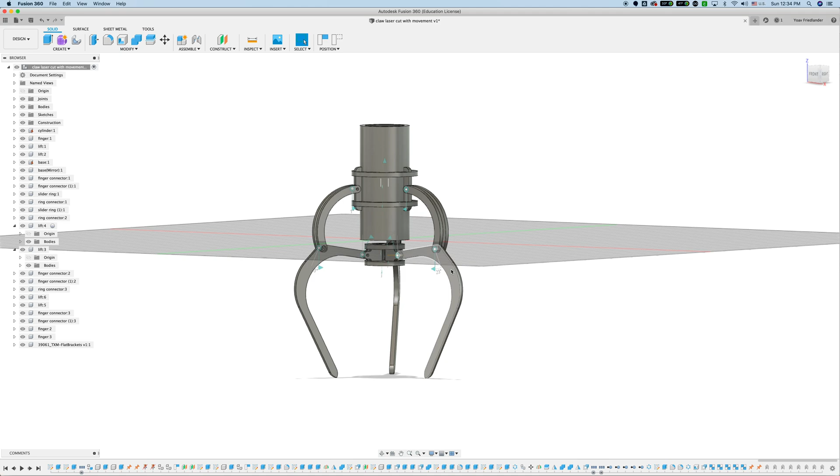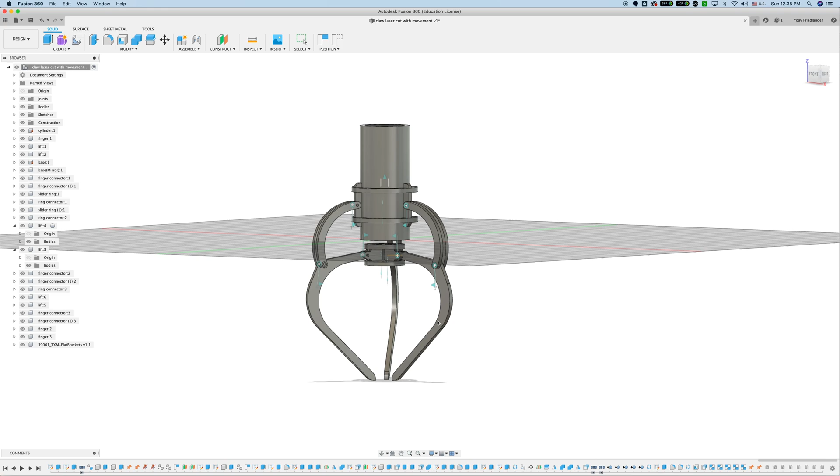I have here a design of a claw, the ones that you are familiar with from toy vending machines that are a useless mechanism that looks very cool but doesn't grab anything. I got obsessed about this idea and I made it with a laser cutter and a 3D printer. So I have this ready mechanism with all these parts that can be laser cut and one PVC pipe. And now I need to bring it over to Onshape.

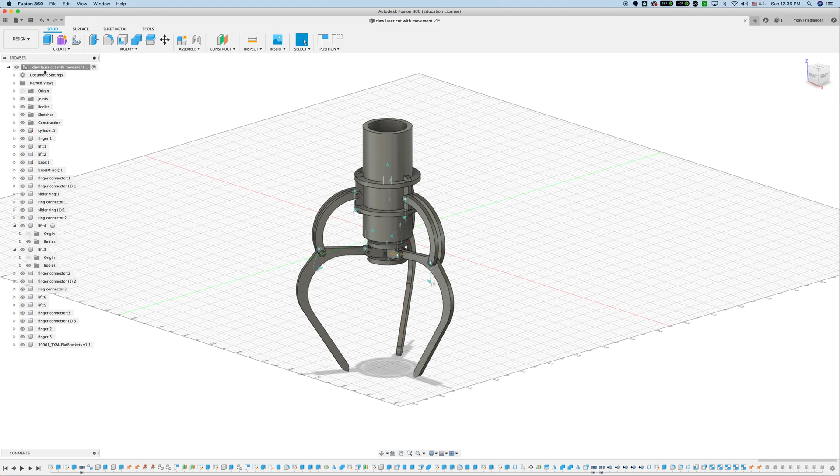There's a very easy way to do that. We first need to export our design to a STEP file. A STEP file is sort of the JPEG of CAD modeling. It's accepted in most design software, and Onshape accepts STEP files as well. So I will go to the panel on the left, where I have the name of my file, the entire assembly, right here on the top, right click and export.

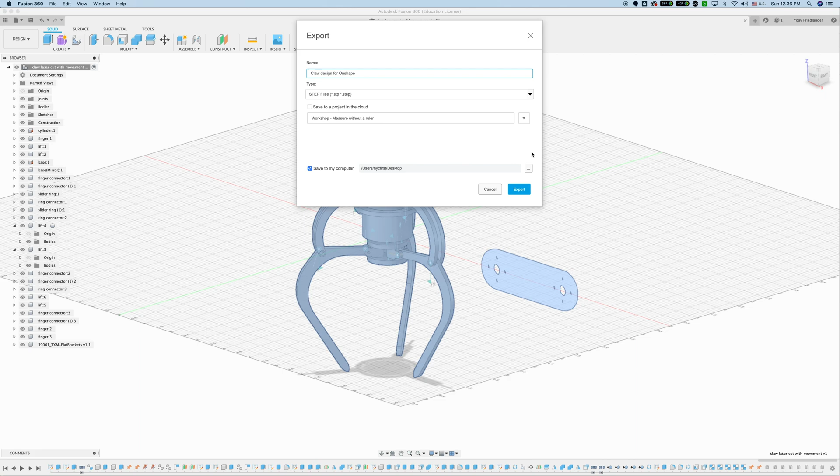Very important, the type we are exporting is a STEP file, STP or STEP, and you have to have save to my computer checked. I'm gonna give it a new name just so we can find it. So this is gonna be claw design for Onshape. Save to computer is checked, and this is the folder I would like to save it in, which for the time being will be my desktop, and I'm going to export my STEP file.

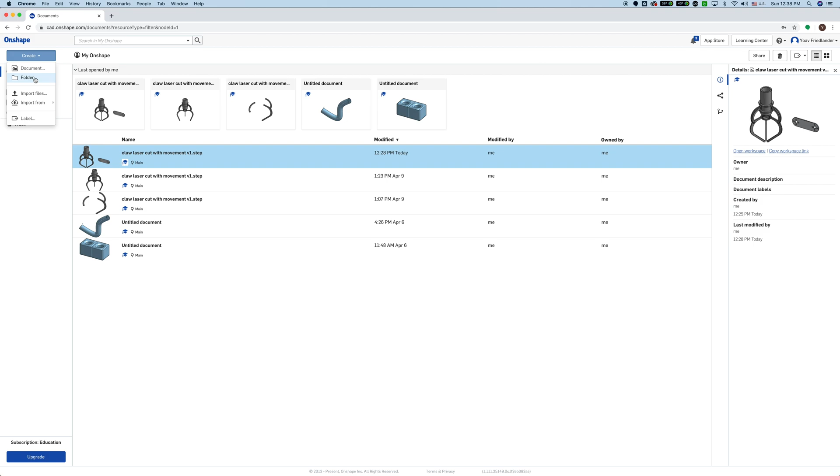In the browser, once you log in to Onshape, this is your normal panel. If you don't have Onshape, they offer free licenses for educators and students. I signed up just to show you guys how to bring your designs onto Onshape. Usually you would create a new document from the create menu, but this is also where you're going to import your design from Fusion that was exported as a STEP file. So click on create, and instead of making a new document or a folder, we are going to import files.

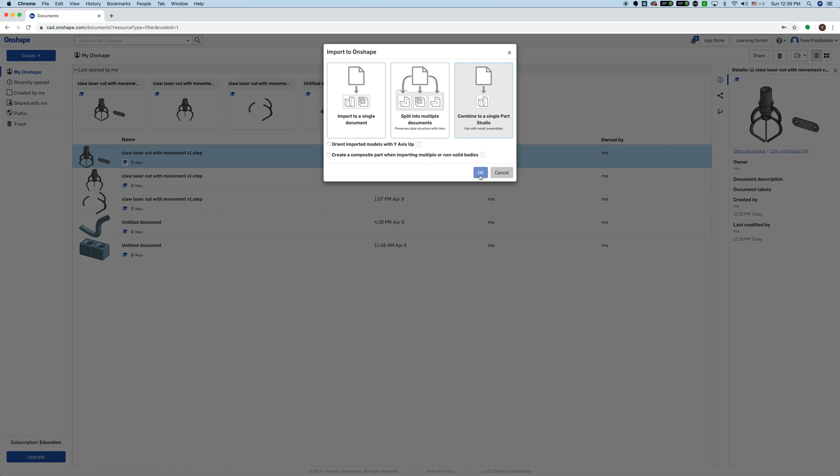Here on the desktop I have the claw design for Onshape, and a very key question is presented: would you import your STEP file into a single document, split it into multiple documents, or combine to a single part studio? Since we have all these components in one design, instead of breaking it into multiple documents, we want to combine it into a single part studio. Part studio is Onshape's version of what you would maybe call an assembly, and that's the option you would like to choose. I will click OK,

and I should be able to see the claw design for Onshape STEP file here in my online cloud folder in my account. So if I click on it, it will open my claw. Now, unlike Fusion, there is a missing tab, a tab that is dedicated to assembly. And we have to create that tab because this is where we're going to actually create movement. So on the bottom, click the plus sign to insert a new element, and you're only looking to create an assembly.

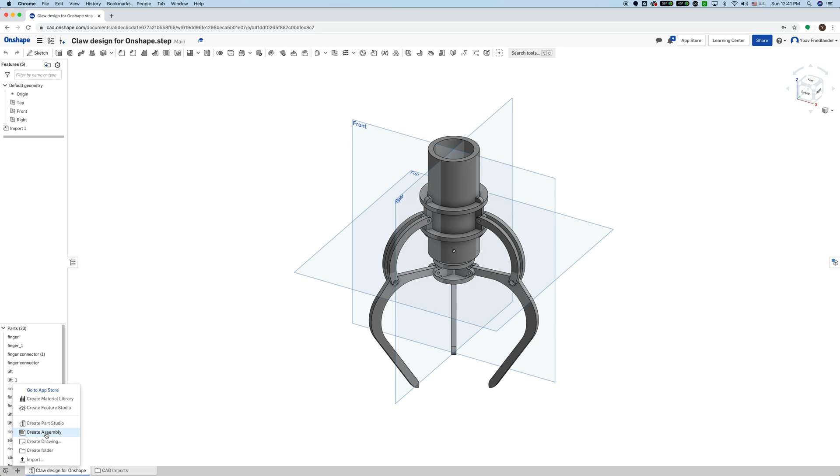Usually when you create a new document in Onshape, it comes with one of these tabs. It's going to be a blank canvas into which we bring the claw or any part that we want from the document. We are going to bring the entire claw and assemble it, meaning add what we called joints in Fusion 360. We're going to see what Onshape calls them. So create an assembly. As you can see, it's empty, which means we need to insert our part or parts.

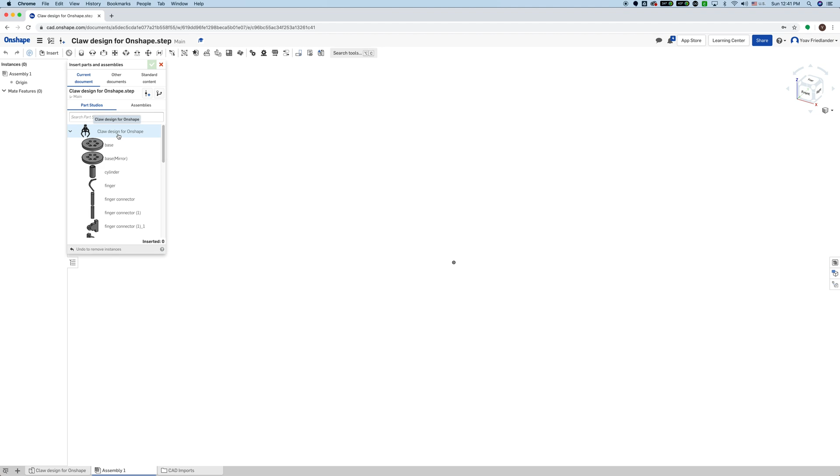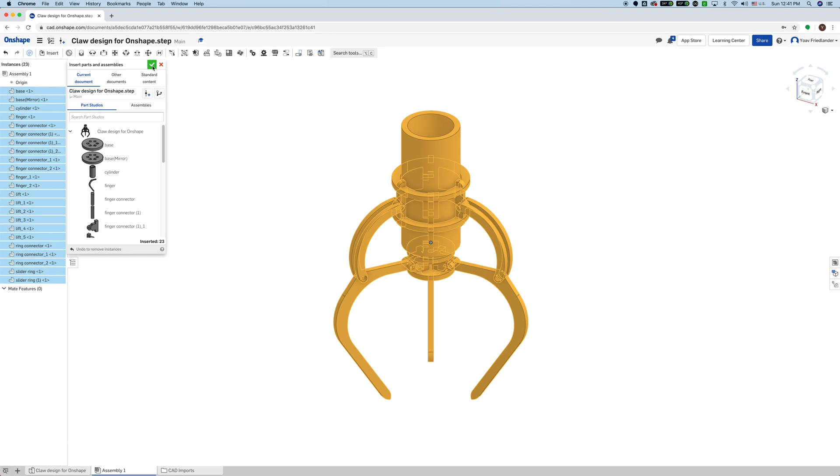So when I go to insert, I can insert separate parts from this claw assembly or the entire claw. As soon as I click on it, I can position it anywhere I want, but that would be the wrong thing to do because it won't be exactly where it was when we brought it, especially if I select single parts and put them around the place. Instead, we only need to press the check mark on top and it will place the claw where it was in the previous tab. Now, although it looks the same, this is an assembly tab, which means we can start assembling.

So three things that we're going to do. One, like in Fusion, ground at least one element that doesn't move, because the movement is going to be relative to that part. Otherwise, everything moves in space freely. Two, instead of joining parts together, we're going to group parts that are already assembled and have no movement but move together. And then we're going to add our joints, which are called differently here. So let's start with the equivalent of grounding, which is right click on a part that's going to be grounded, or fixed.

So fix is the equivalent of ground, which means a cylinder, a PVC pipe, will not move. Everything might slide and revolute in relation to the cylinder, but the cylinder is not going to move, and that's important. Otherwise, your joints are not going to work. So this is part one, fixed.

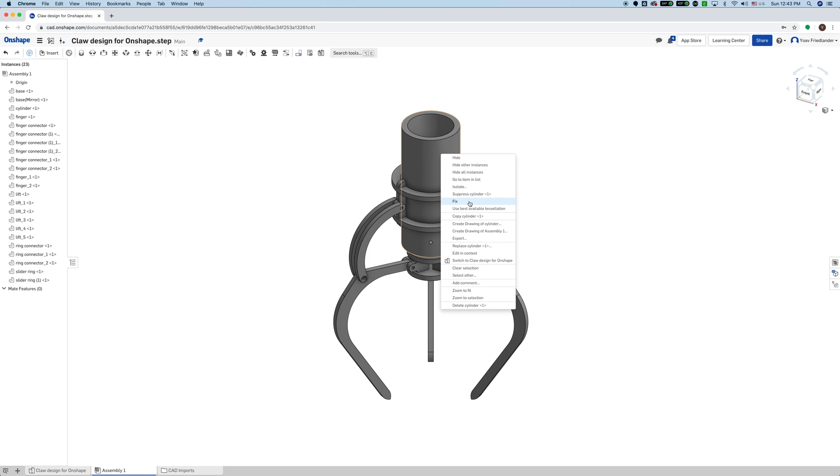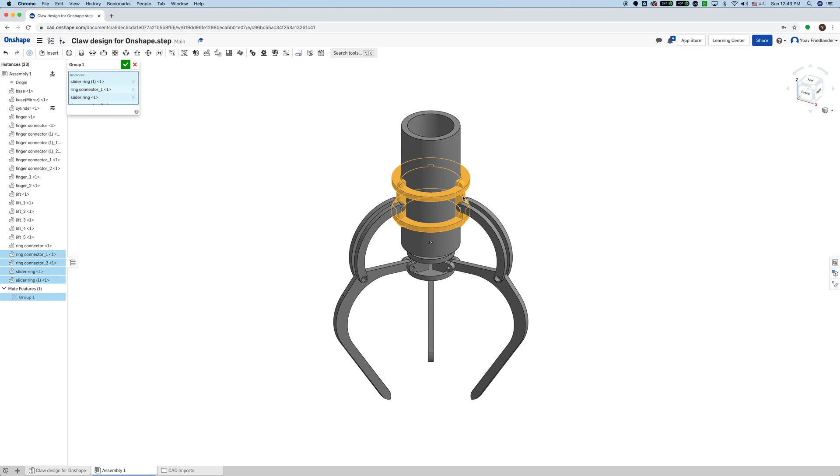Second of all, I need to group certain parts. So up here we have the types of joints. We'll know their name in a second. And here is your group. Click on the grouping and then it asks you to select the parts that are making a group. For example, all these laser cut parts that were originally wood glued together when cut with a laser cutter, but here instead of wood gluing, I'm just grouping them. So I group number one, done. It can now slide up and down when I'll create the proper joint.

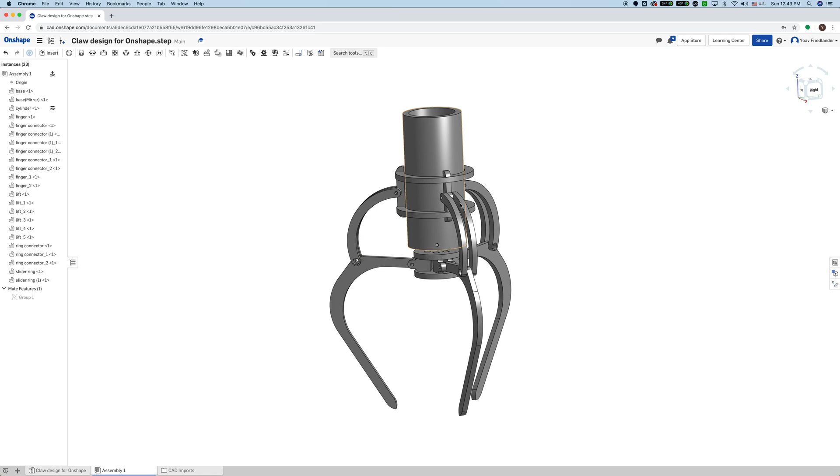And the second group that is actually also going to be fixed is this group down here. The movement is happening between the sliding and revolution of the other parts. So again, group 1, 2, 3, 4, 5, 6. I don't need to hold down any key to select multiple. Automatically it can select multiple parts together. Press the check mark, and any of these elements, because they're grouped, if one of them is fixed, anything in the group is fixed with them.

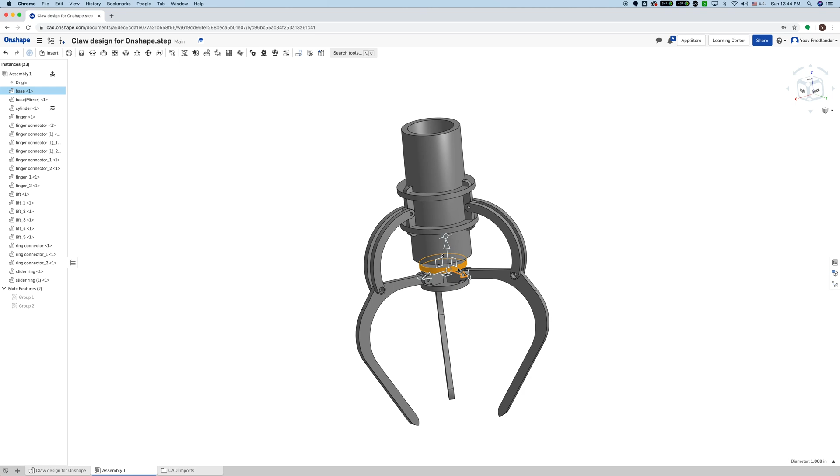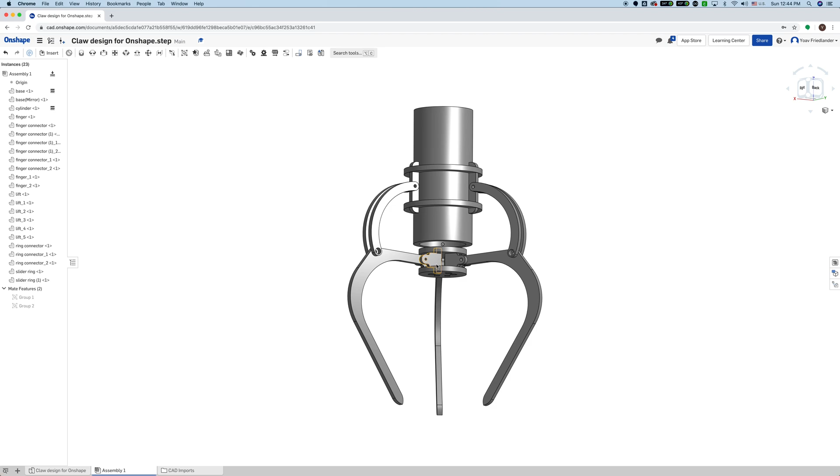So I'm going to right click on one of the parts that are making this group that is also supposed to be grounded, and I'm going to fix it. We could have at the same time grouped together the cylinder and this part because there's actually a missing part that is connecting this part to the cylinder, that is not part of the design because it had to be thought through in the time that I was making it. But let's ignore this. What you need to know: whatever needs to be fixed and not supposed to move, right click and fix it. If it's a group, only one of the elements is enough.

And now let's see how we add joints. So joints in Onshape are called mates. So here we have fasten mate, which is a rigid joint, meaning they're like bolted together, they're not supposed to move. It's like a group, but it also determines the position. Revolute, slider, planar, all these types of joints are familiar, and they're just called mates.

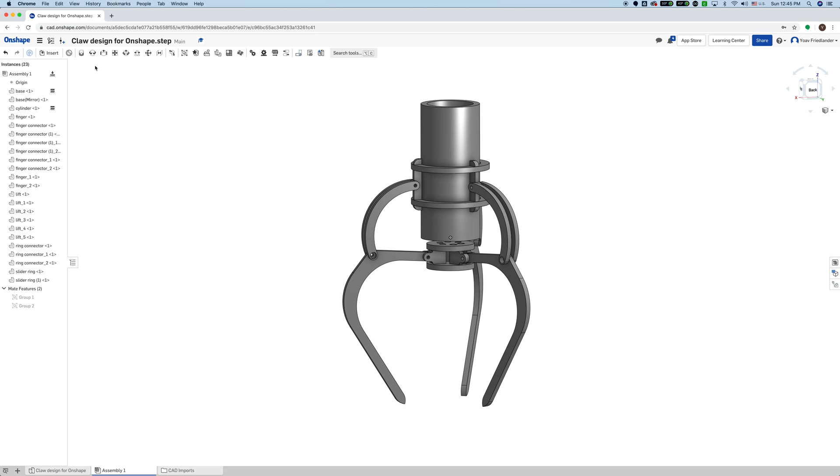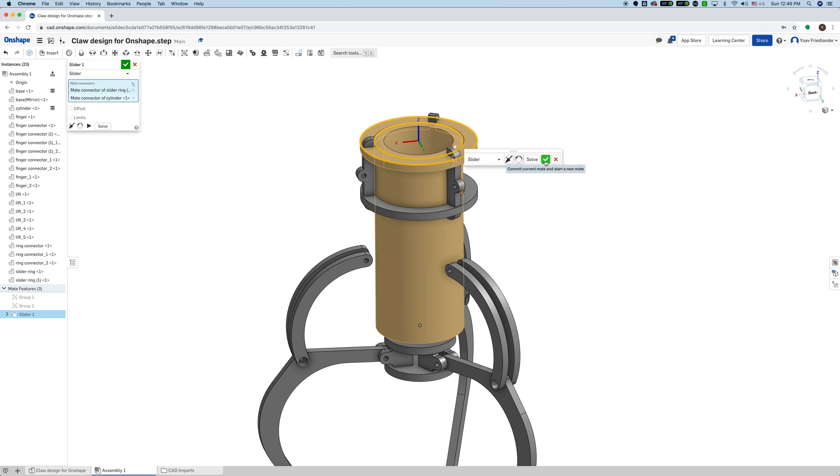So we need a slider mate or a joint between the cylinder and this group of parts that we grouped together. So if you can see, when I hover over the edge of this circle, it selects the center of that circle, which is quite good for us. So I'm going to select the edge, and by that select that center, and the same, I am creating a sliding operation between this group of parts and this cylinder. So the edge of the cylinder, and as you can see, it joins them, creates a mate between them, and aligns them to the top, which is fine because this is a sliding operation. So now if I click on it and drag, it is limited to sliding up and down.

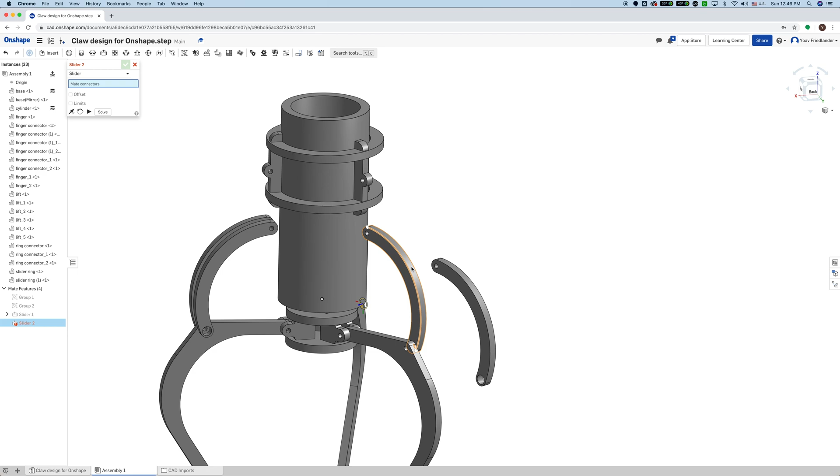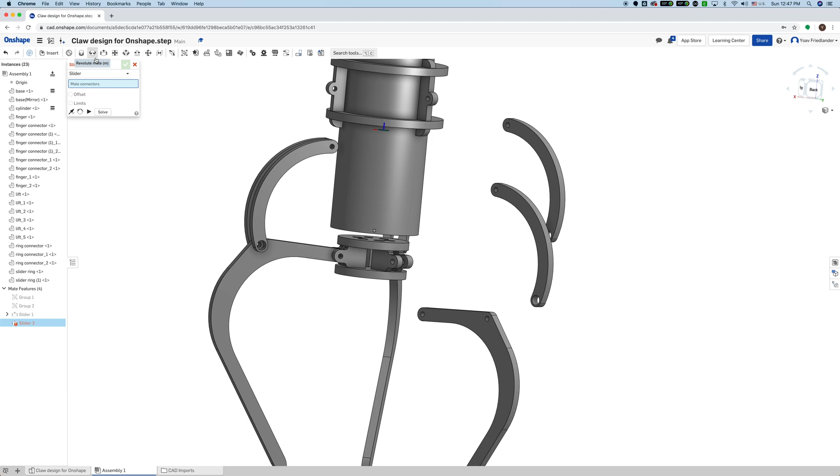Now let's see what else we need to do. So I'm going to take these two parts and just move them aside, just because I'm going to join them back using a mate or a joint, which will determine both the freedom of movement and the position, and again also this finger here. So let's first start with the finger. So a revolute joint, a revolute mate. I don't know why that just jumped, but let's try again. 1, 2, 3. Okay,

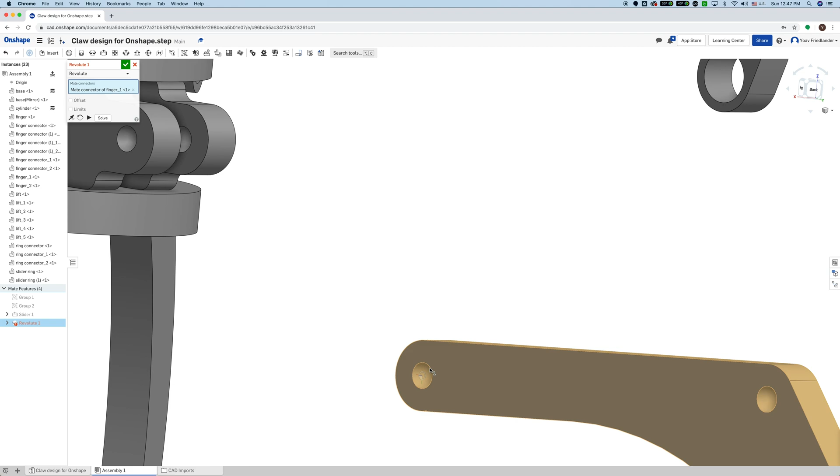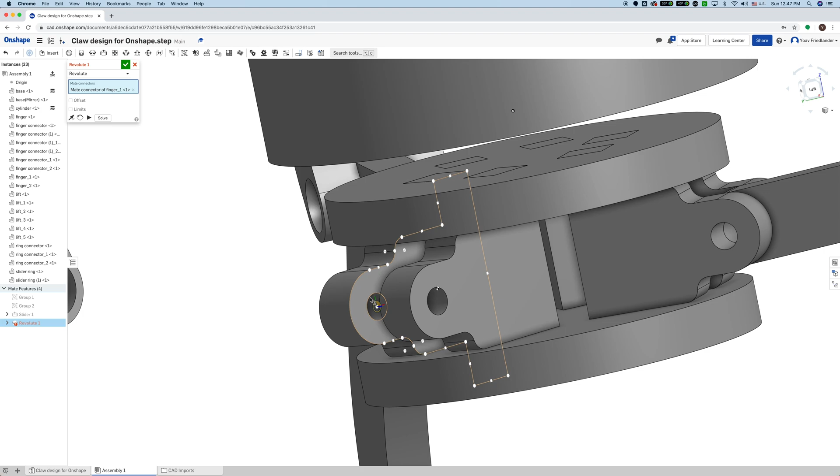a revolute mate between this point of contact, this cylinder, this hole, like where we would fit a pin or a screw to enable the revolution, and where it's supposed to be placed. As you can see, this marker is the position of the joint or the mate. And as you can see, it aligned them together. I'll press the check mark, and now you'll see that my movement is restricted to the revolution between the parts, where one part is fixed. Therefore, only the other part can revolute relative to that part.

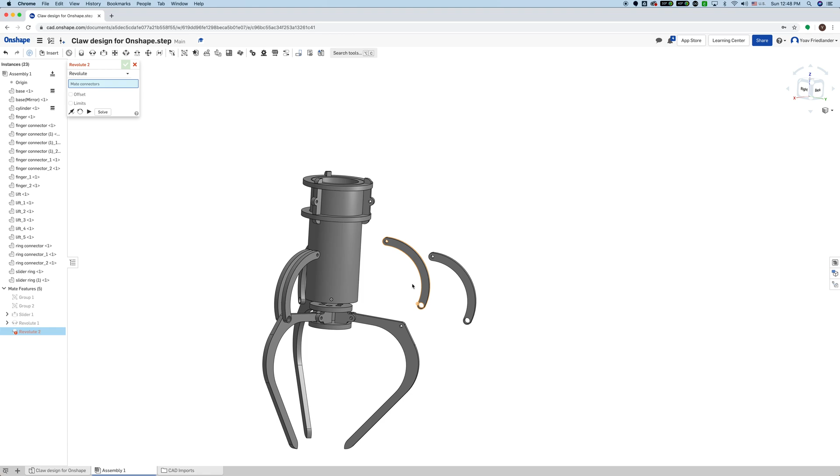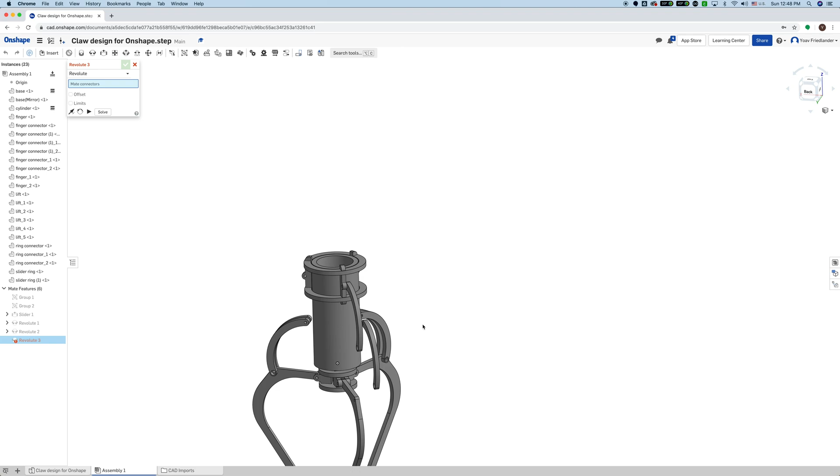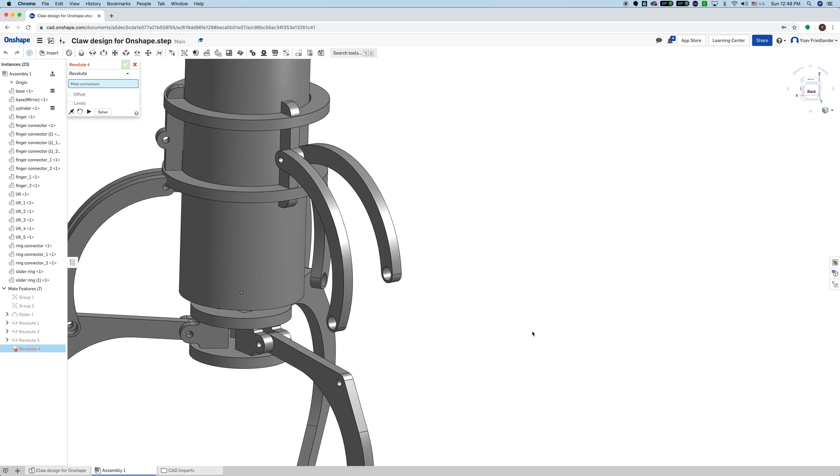And now let's do those arches. A revolute joint between that cylinder and this cylinder here, cylindrical part. Press OK, and we need the other handle, and we're done with this. Just for the fun, we can see that this can both slide and revolute, which creates a problem. Obviously, this is not how the mechanism is going to work, but once we have the proper restrictions of movement, you're going to see that the slider is going to be limited to the allowed movement with those grabbing fingers.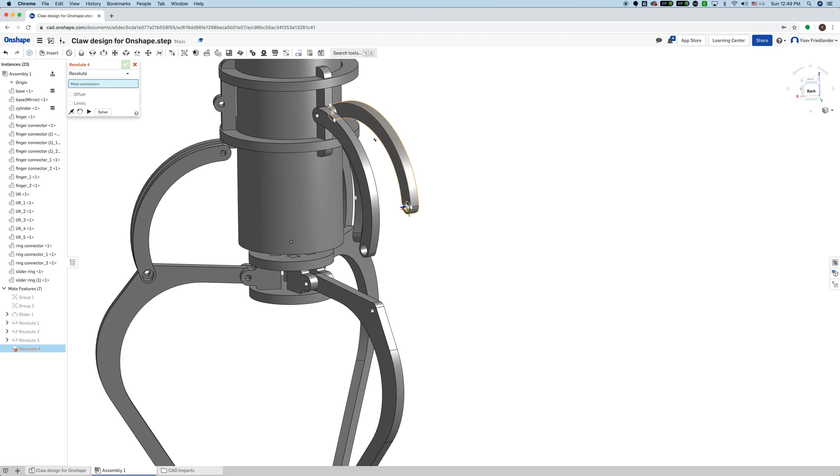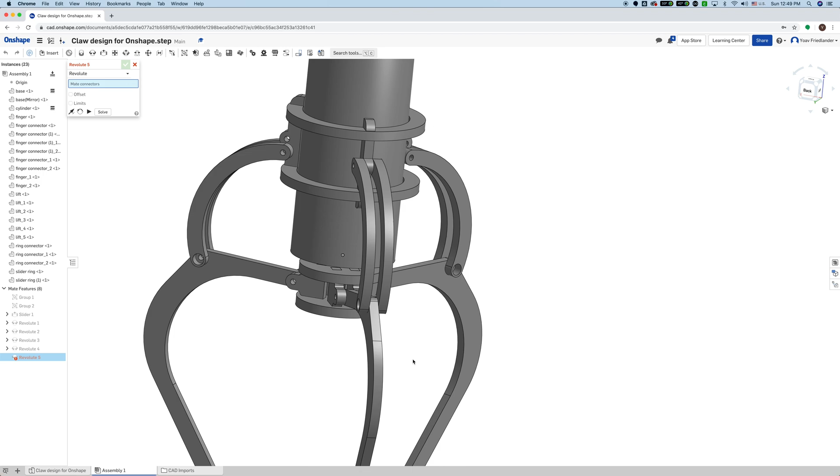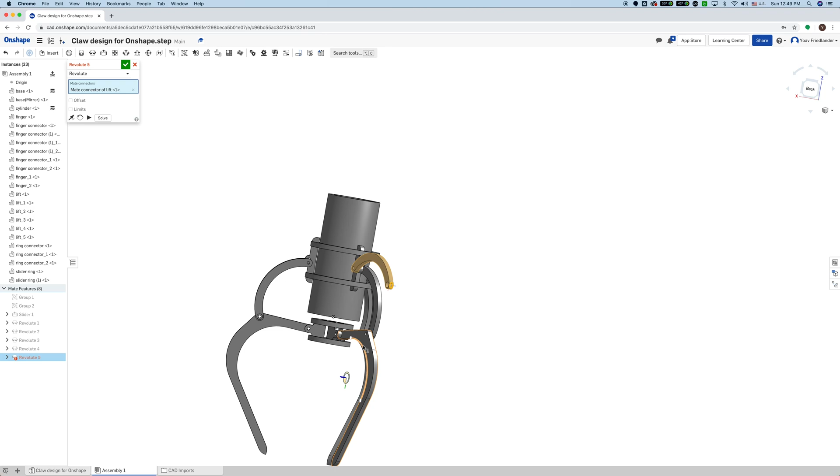Again, revolute joint mate between this point and this point here. It's not gonna stay hovering in space. It's trying to move it down here, but actually it's also jointed here, so it's gonna lift it up, and now these things are connected. This is still not joined, but now I can show you the limit of movement of the finger. And lastly, we're going to make this connection here, apply, and we have a working mechanism. So we need to do the same thing to the other ones, so let's do them quickly.

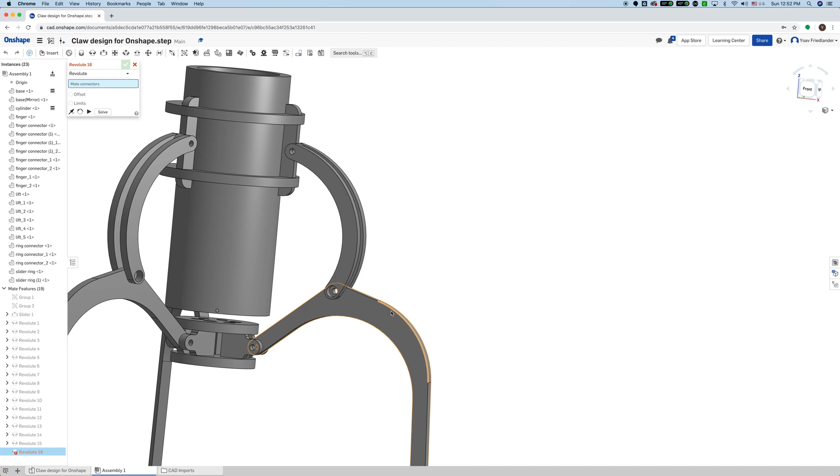And here we have it, the same kind of mechanism, mates instead of joints, and Onshape instead of Fusion 360. Your design in no time.